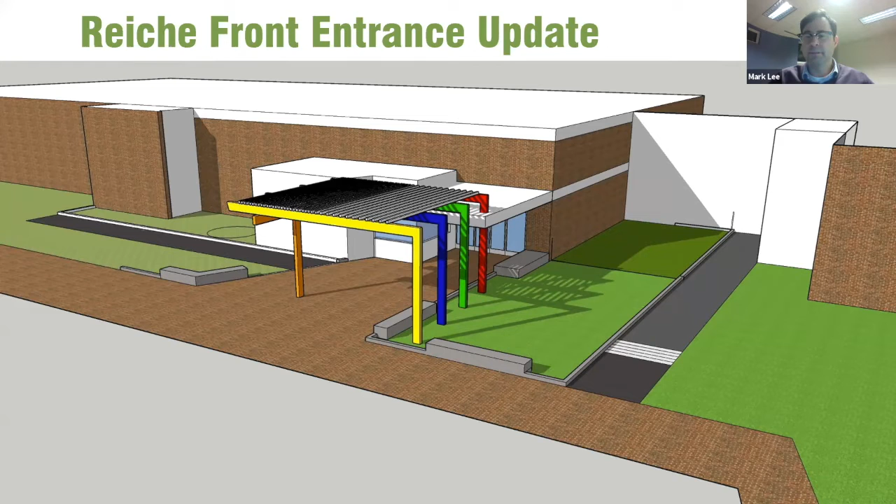Looking forward, I want to understand what the recommendation might be: whether to continue to evolve the design with the idea that there's an additional cost to having that element versus not having it, and what the desire or recommendation of this group is to move forward. I'll pause for a moment here. I know we had some that were in favor of it, and some that were not.

So, Mark, are you looking for feedback given the ballpark cost of the trellis? That's right. And I don't know if you're prepared tonight, but it might also be helpful for us to look at this in the context of some of the alternatives we had teed up already. Go ahead, I'm sorry. I see Matt Peters has his hand up, but go ahead first.

We have had some estimates, and I don't have those prices with us right now, but we can circle back to see what those alternate scope items were that we had identified. I think there were things such as the pre-kindergarten classroom, the connector above on the second floor, and the reconfiguration and improvement of the kitchen area was also another alternate. We can report back either by memo to the rest of the committee on what those alternate scope items were.

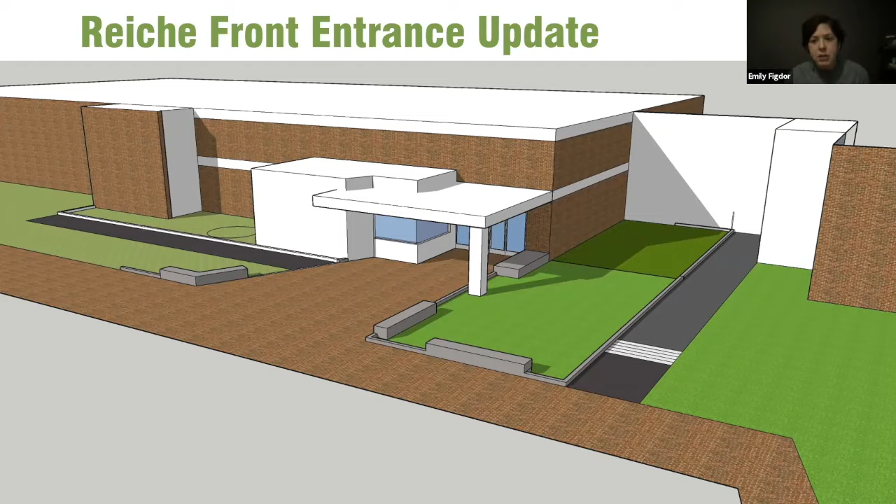That seems really helpful. Matt Peters, did you want to jump in here? Yeah, I did. Just in general, I think it's really hard to discuss this without that added landscape architectural comparison. This image is very hard to react to, and we're missing the discussions you are having with the green team.

What you do have to maintain the existing trees, since most of them are mature trees, would be really helpful. Second, echoing a comment I made last time, I did appreciate the desire to have the flying entry be a joyful entrance, and I think there's a way to mimic that joyfulness along the pillar and other art installations, but we're not getting that in this conversation. We're not visually seeing that, so it's hard to make a full comparison.

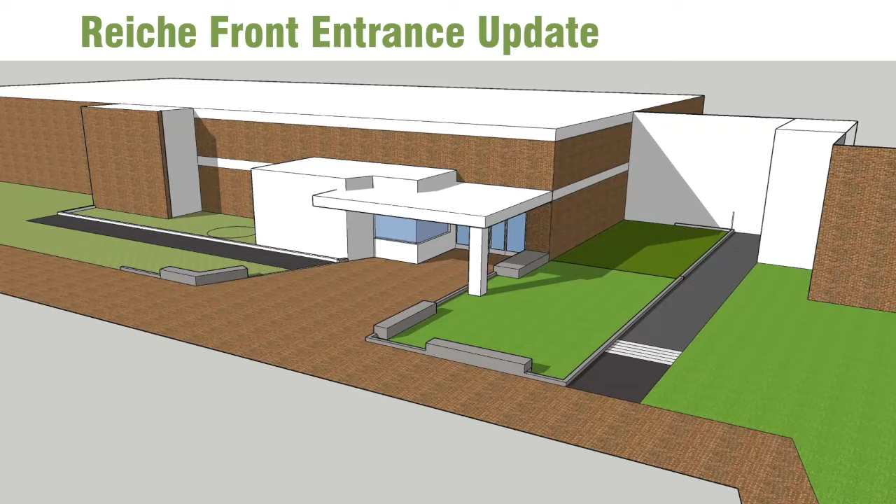Yeah, there are a couple of really good points there. We can go through the next few slides, which talk about the entrance landscaping, if that's helpful, and then we can come back to this if we think that would be helpful for the discussion.

Jeremy, do you want to jump in now? Yes, thank you. I just wanted to say, I don't know if other people agree with me, but I feel like the 150 to 200,000 sounds like potentially a large amount of money for a decorative item. However, I like the idea of it, so I'd like to see it happen. But at the same time, the building is very pared down—I don't know if it qualifies as brutalist architecture, but it's a very pared down building.

I kind of like the idea put out by the last speaker, who said those joyful elements can be brought in other ways that are more affordable and can also involve the children in making them, like they do in the garden. So I think this could work, and I think it does the job—it's an entrance, it marks it from the street view as an entrance.

You would be able to walk up—I know this is very simplified—but you'd be able to walk up, see something like that, and know where you were going. So functionally it's not necessary. I think it would be nice if the cost is that much and there's something extra that can be done that's more desirable. But to the last speaker's point, if we don't know exactly what we're talking about, because we don't have a clear look at what it's going to be, it's hard to say whether it's worth spending on, since we don't quite know what we're talking about. But yeah, thank you.

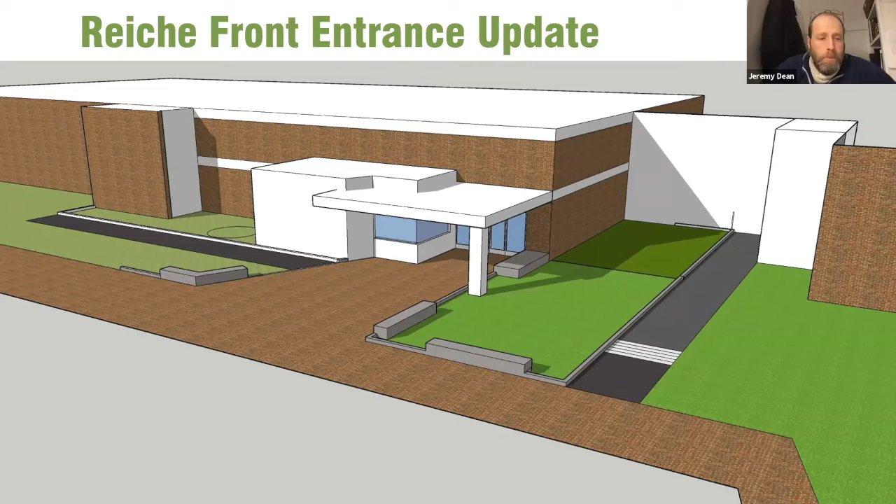It's a great tree. It's a good mature tree, very healthy.

So this is in plan, and I'll use my cursor so people can understand. That raised bed right now is the blue dash line, and the mouse is circling around where it is right now. The tree trunk is right here, and then the canopy is shown here.

The idea is that we would cut the raised bed back to the corner of that entrance right here. It originally was shown cut back to here on that angle. It's now coming out to this corner, and it'll come up to meet essentially the same edge, and then we'll extend raised curbing back to the stair.

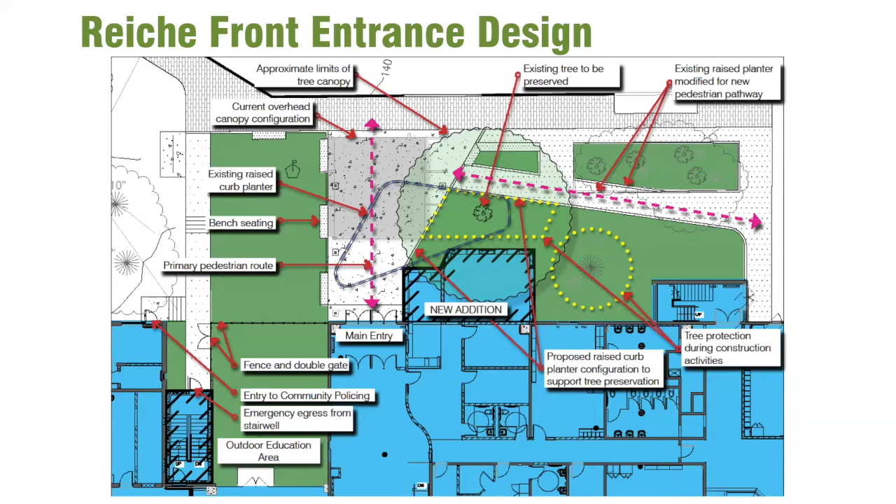I think it's a great comment, Matt, and I actually like the way they engage—you don't get that from the simple massing model that was done, where you don't see the interplay between the tree canopy. The tree and the canopy itself soften very much the hard lines of the entrance addition and the building.

Any other feedback or questions about this? I don't know if Lisa, if you have some of those figures.

Are we looking for the alternate figures? Yes, I think that's what we're looking for. Let me pull up. So let's see here.

The alternate, so the corridor connector that connects two sides up on the second level, that's coming in at about $140,000. So pretty comparable to what the canopy would be.

The upgrades to finishes within the small group rooms within the school is about $60,000. The pre-K, the alternate pre-K location, which is in the Brickworks area, is about $200,000.

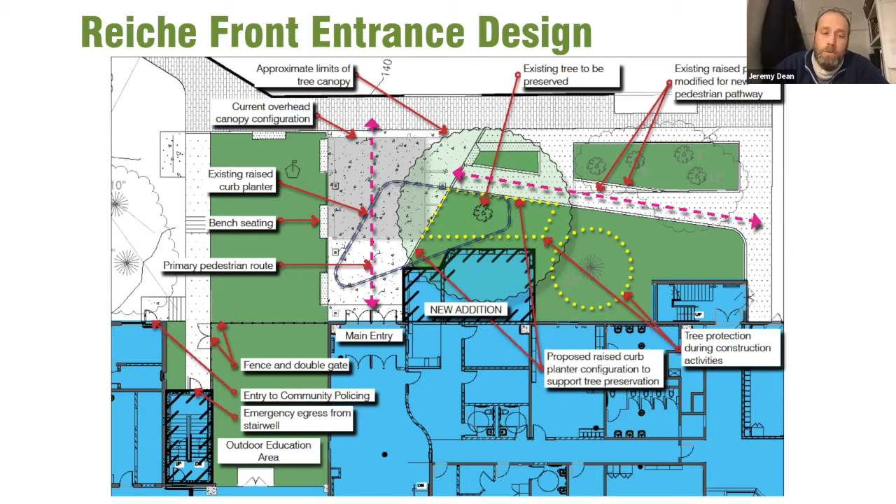Jeremy. Well, I know I spoke already, so maybe my opinion's obvious, but I would have it priced as an option. I mean, if we're getting a bid back on it, it means we have it on the table. But some of those other things looked really desirable when we went over them before, and some of them are affordable with that money. So I agree with the previous comments about softening the look, with the tree and that stuff. I think that really works, but I'd still like to know what it would cost.

Mark, is there any downside to including it as an alternate? No, I really don't see any. I think the degree to which we just complete the documents around the design of it and the contractor prices it, there's no downside. Just look at how it integrates into the rest of it and make it as separable as possible, so that if it's taken, it's not a problem. If it's not taken and wants to be added on in the future, that it could easily do that.

Okay, well, I'm getting that that's the consensus of this group, but I don't want to make assumptions. So is...

I'm muted, I'm so sorry. I was just saying that I think that seems to be the consensus of the group, that we include it as an alternate and can evaluate it later on. But is there anyone who really feels strongly that the trellis really should be more of a core part of the project moving forward? Or are there alternate ways that folks would suggest we move forward? Because I'll stop there.

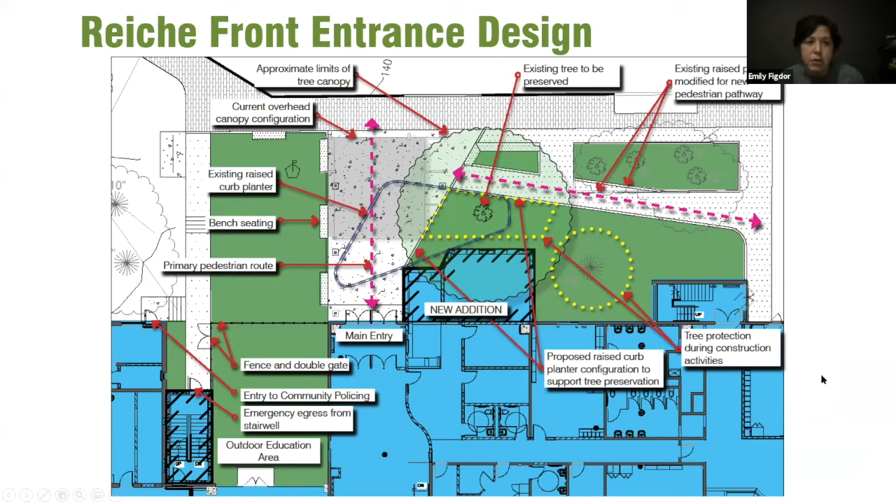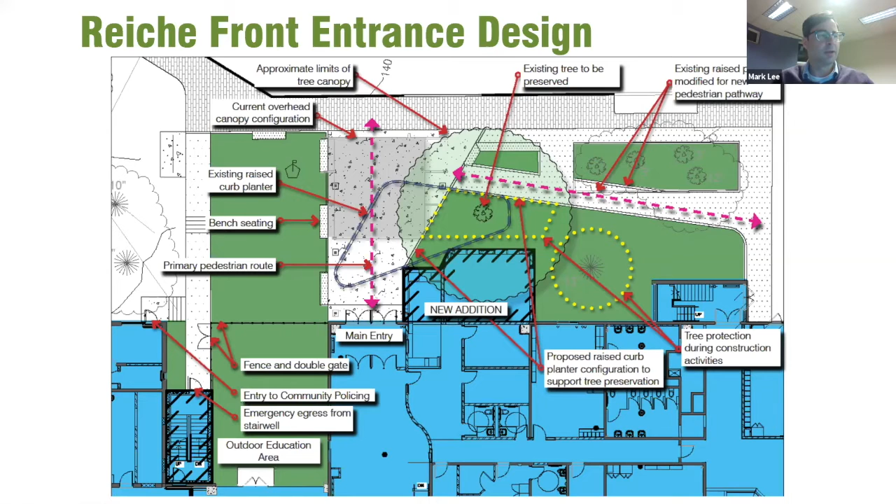Okay, it seems like we're in a good place, that there's quite a lot of agreement to include the trellis as an alternate. Great, no, that actually is very helpful. It's been a conversation for quite a while, and it just gives us direction to move forward. I really appreciate the feedback and thoughtful conversation on this.

The next piece is one that isn't very visually stimulating, but it's a really important part of the project as we get ready to go and complete the bidding for the work. And that is not only the construction costs, but the project costs for the work. So just a quick history of the project budget.

As we all recall, the scenario 1A classroom began about a year ago, and we established these buckets of money appropriated for each of the schools and of the 3 remaining schools, and we've been pretty consistent with maintaining those budgets. We had a $21 million budget for the Reiche school project, and that $21 million was built on a 25% add to the construction cost. So that's how we arrived at all of them.

We actually didn't start with 21 million. We actually started with construction cost, and we'll cover that in a second here. But essentially, if it's 75% for the construction, 25% of that 21 million is for the soft costs.

Going way back to 2017 is when Oak Point first established these construction costs and total project costs. At that time, they anticipated that the construction cost was going to be around 13.6 million, and that the total project cost would be around 17.2 million. So that was way back in 2017, and it anticipated escalation to a sort of arbitrary point in time, and it averaged out the escalation for all 4 schools to an arbitrary point, kind of middle of when they all might bid.

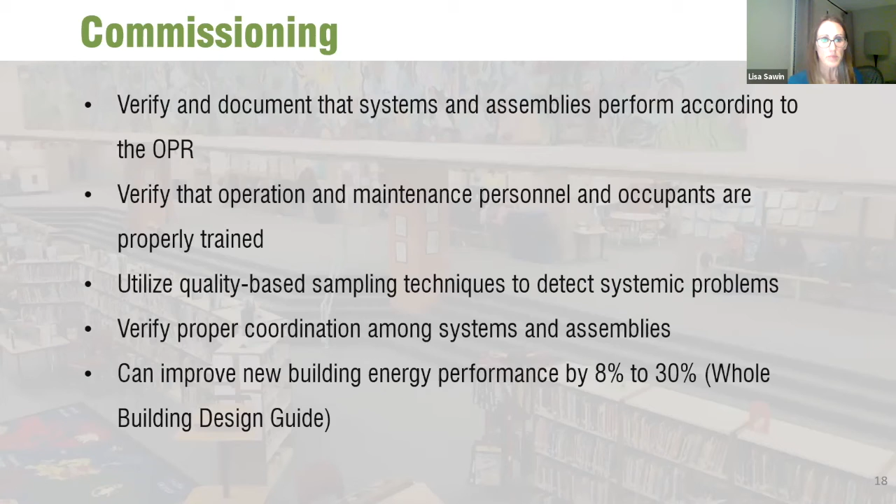On the next slide, these are the systems that are commissioned: mechanical systems, mechanical controls, as well as electrical systems, plumbing systems, and building envelope systems. Another thing is they make sure the occupants are well trained on the systems, as well as the facilities department, so that when we are done, you have a building that operates as intended, and you know how to operate it as it was intended to be operated.

It's also a prerequisite for LEED, so we have to do it if we are going after LEED certification. So it's not only a best practice, but also a prerequisite for that sustainable program.

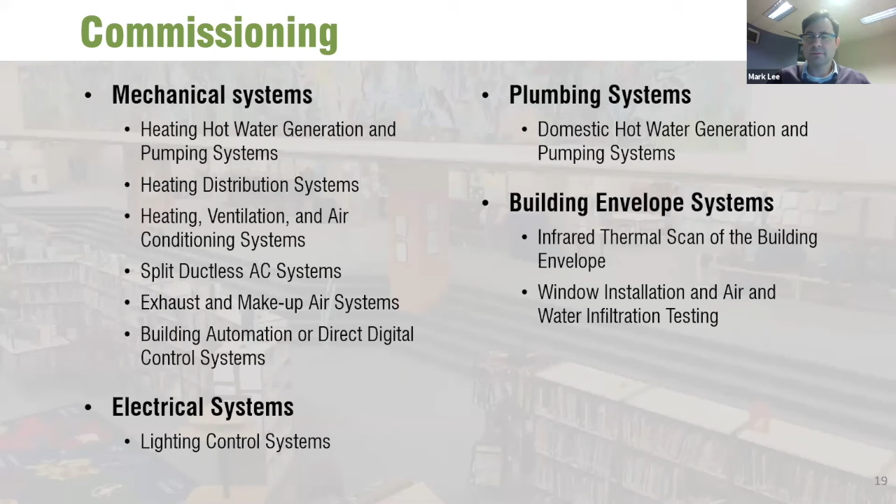Any questions on what building commissioning entails, or why we're undertaking it? All right, quiet group here.

Next we'll roll into a few of the last steps. As we've discussed, we're getting close to sending this out to bid for contractors to price, with a staggered approach: first Longfellow, then Reiche, then Presumpscot. One of the upcoming meetings is the safety and security meeting, which will look at the building strategies we've put in place that align with your policies and procedures regarding safety and security in the building. So it's systems and practices, and making sure those align.

It's a similar process to what we did with the Lyseth project, relating back to when we participated in a drill - I think it was called stay in place or something similar - where we understood how the building was secured to the best extent possible, and thought through some of the practices there. So that's really important.

Also not shown here, we have a meeting with the health partners to review the layout provided for them, to ensure their needs are met as we shift them from the space on the second floor school side to the other side. That's coming up. And then we have interviews for the clerk of the works, a position hired to be the daily eyes and ears observing construction and recording it, ensuring the contractor makes necessary progress on schedule and generally follows the construction documents.